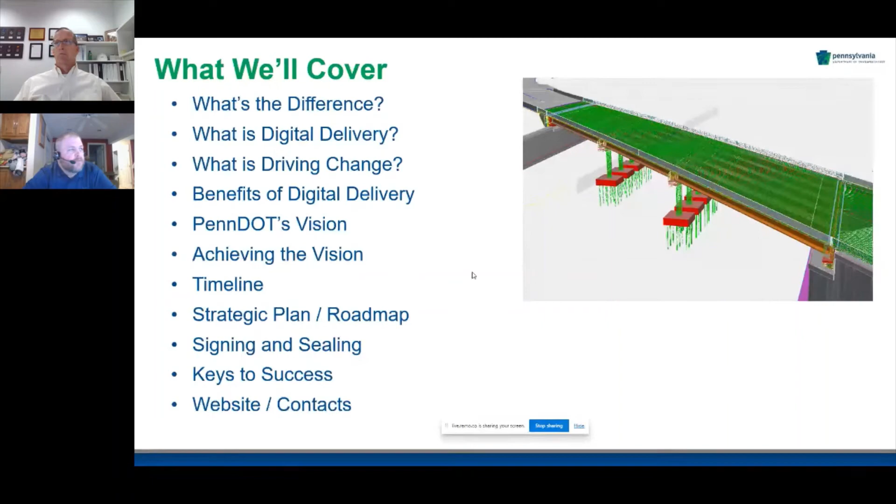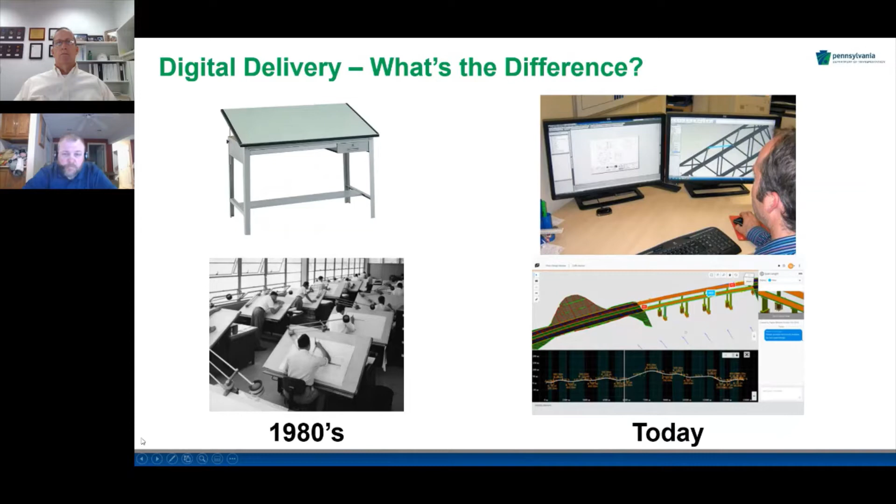So why would I take all of that capability available in that smart TV and put rabbit ears on it to get the most basic of signals we can have? That's what we're actually doing with our design processes. We take our designs, which some of us are already doing in a 3D environment, and basically dumb that down to 2D plans. Why? Because that's how we've always done it, that's the way we know how to do it. So in the analogy of the TV, it's that cathode ray picture on a high definition TV. Why? Because that's how we've always done it.

So it's really time to embrace a new way of doing things. Stop taking that smart data that we're developing in design and creating in construction and breaking it into less meaningful pieces. Really rethink how we approach the whole project delivery process, and the outcomes are limitless. We have so many possibilities, and we need to get away from that thinking of 'but that's how we've always done it.' We need to think outside of the box.

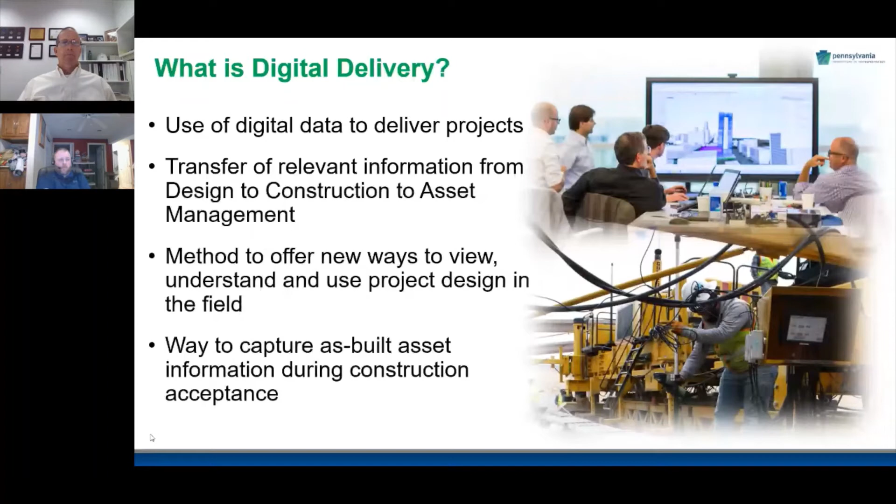So what's driving this change? The amount of data is becoming very hard to manage, and it's only going to exponentially grow over the next few years. So it's not just about managing or creating this data, it's how we're going to manage it. There's been a study done recently that showed employees spend an average of 1.8 hours a day searching for information. That's only going to exponentially grow if we don't manage our data correctly.

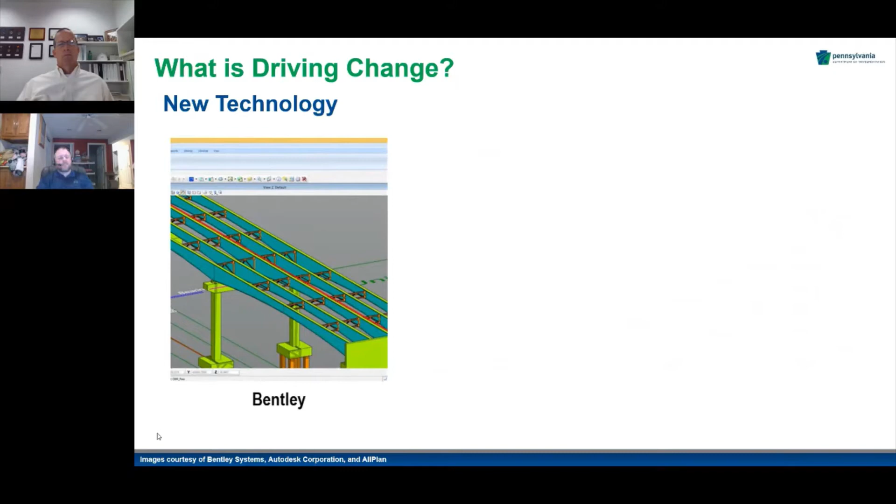So there's all kinds of new technology coming out that's going to enable us to do these models—the Bentley product, the Autodesk product, the Allplan software. Most highway agencies within the next year or so will be on the newest platform from one of these software providers. It offers us new functionality like dynamic change propagation and smart objects on these modern platforms, making it easier for us to develop these models and move forward.

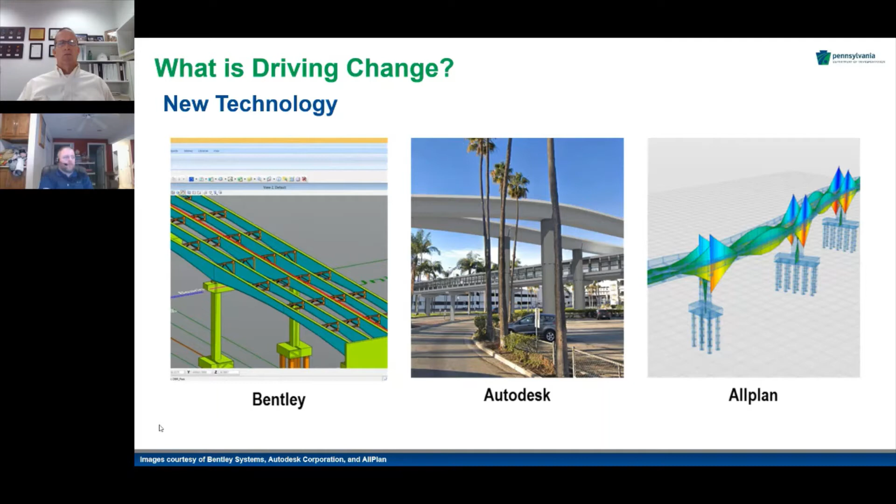So what does this really mean? We want to produce products and projects using this model-centric approach for design and construction. All the typical items we would see today on a normal traditional set of plans will still be included in that CAD model.

You'll see details—we'll be able to attach details as PDFs. You'll be able to attach calculations and spreadsheets directly into these models to convey that design intent to the contractor very easily. We'll be able to add photos, videos, Word documents, etc., again to give that design intent of exactly what was intended on these plans.

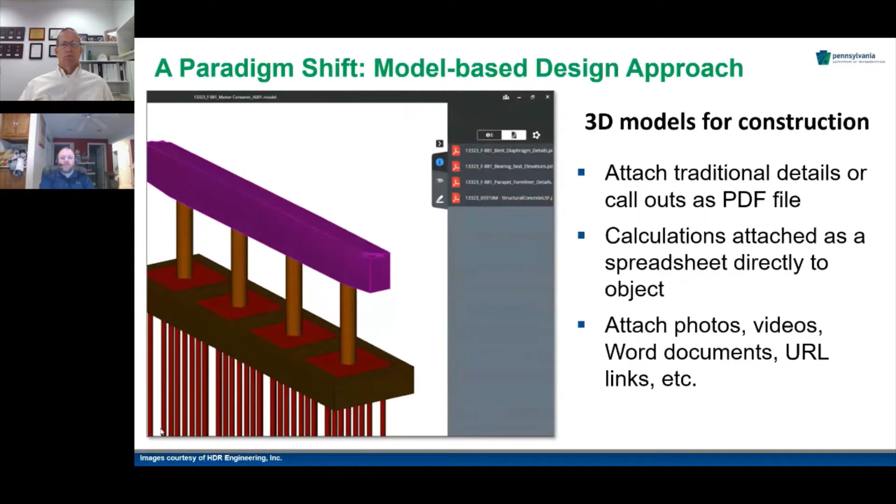So it is going to be a paradigm shift, and it's going to be a mixture of 2D and 3D objects. Some of the 2D objects may be right-of-way lines, paint lines, construction limits, but that 3D model will represent the overall design intent of our project.

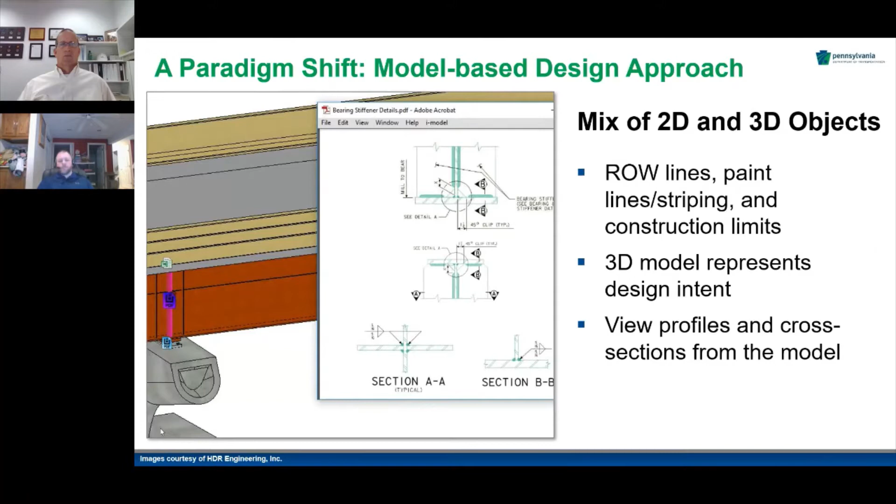We'll be able to view profiles and cross sections directly in the model, so we'll get away from cutting all of those sheets of cross sections—they'll all be in the model as we move forward. The model will be the document of truth, and it'll be contractually binding.

But we do realize there will be some plan sheets still necessary, like for right-of-way acquisition and recording. In Pennsylvania, we've just recently gotten our courthouses to accepting microfilm, so it will be some time before they actually accept models.

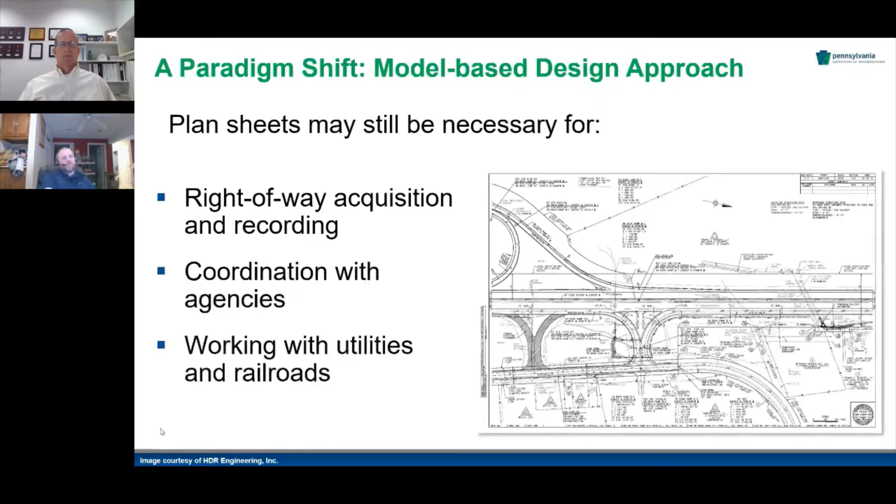So with that, we'll still have to provide plan sheets for coordination with outside agencies that may not be ready for models, working with utilities and railroads—some will be ready for it, some will not. So we may still have to produce plan sheets, but that model will still be the primary document of truth as we move forward.

So what are some of the benefits of moving towards digital delivery? You can see it in improved design quality, reduced risk and project costs, increased construction efficiency, and improved as-built records.

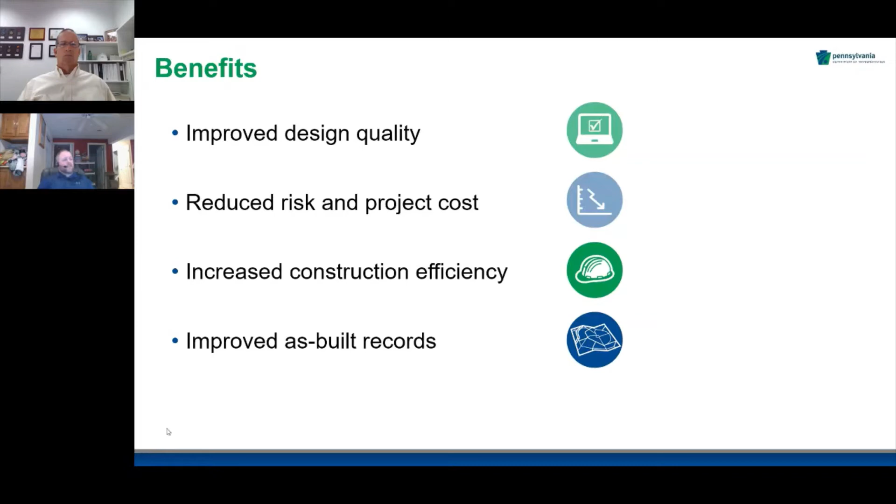So let's take a look at improved design quality. Once everybody starts designing using the model-based approach, it will be easier to review the quality of the design intent. A 3D environment will allow us to view the design in ways that were not possible with 2D plans. A model-based design approach will give us the opportunity to review our design intent before we bid the projects, and we'll be able to see the roadway and bridge details together and find issues earlier on.

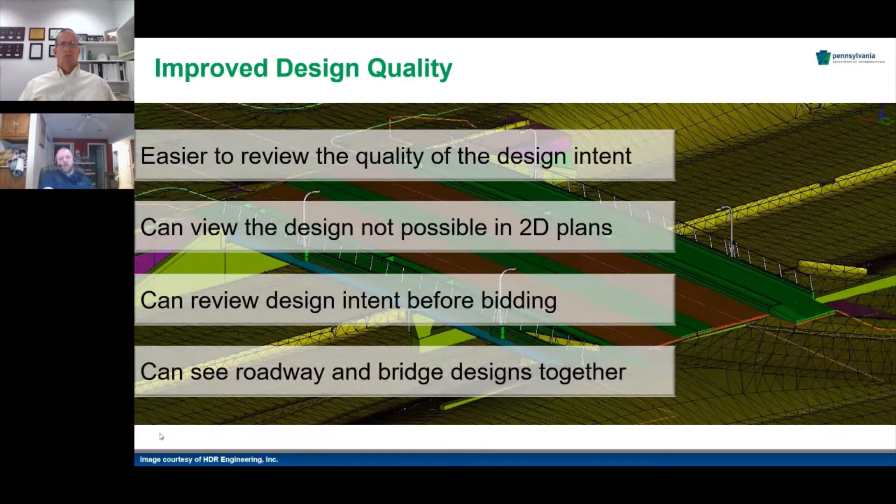Moving in this direction, this chart represents a plan-centric approach with the black line. This is where we put less time into detailed design and more into plan sheet development. That is our current process. It takes quite a while to develop those plan sheets and get them to meet whatever standards are required.

We want to move that line to the green line, line 4, a model-centric approach where we're able to add more detailed design and won't have to spend as much time on plan sheet development. Earlier in the project we have the ability to affect cost more easily, so it's a lot cheaper to make bigger changes than in a plan-centric approach where the cost of plan changes is much greater.

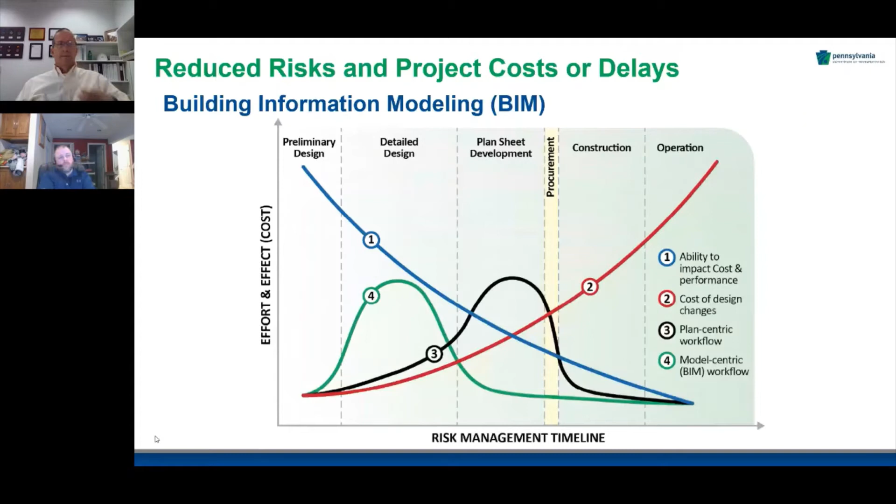As we look at the 3D models, they'll produce more accurate designs and allow us to enhance project coordination and quality reviews, especially for utility conflicts, but also design errors and omissions. The 3D design will let us identify constructability issues early on, which will translate into a reduction of change orders and unforeseen conditions, which account for a good bit of the cost of change orders.

These subsurface utilities were identified in the 3D model, done to a quality level I believe is D. They're shown as ribbons, representing the area where that utility could be. This lets us identify soft clashes and hard clashes as we move through design, helping minimize those change orders as we move to construction.

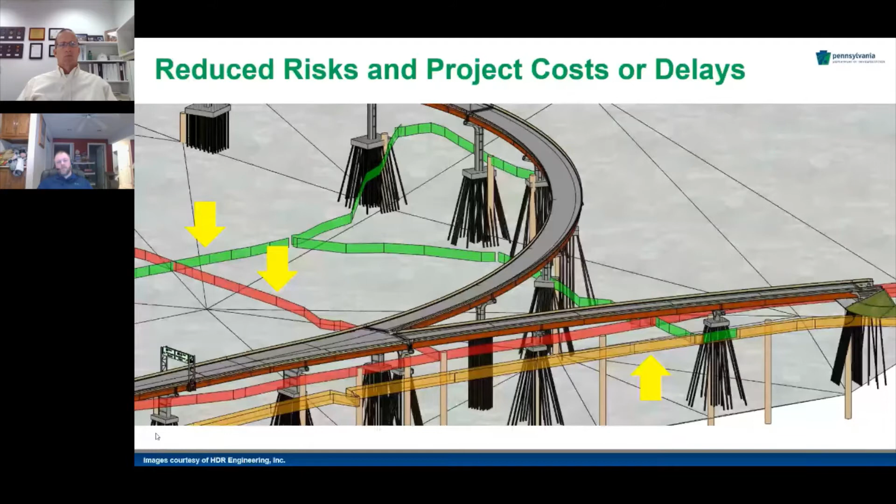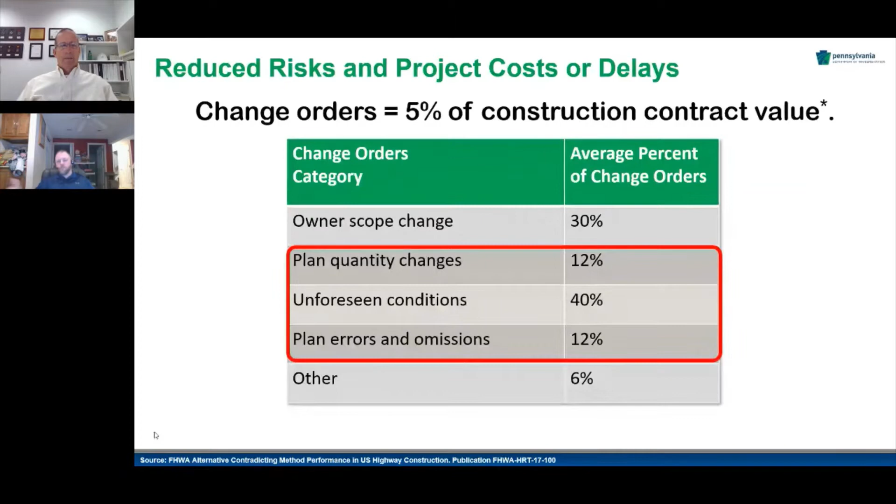As we were speaking, change orders account for nearly 5% of construction contract value. With digital delivery, we hope to reduce change orders in three areas: plan quantity changes, unforeseen conditions, and plan errors and omissions. With higher quality, more detailed design, we are hoping to realize these cost savings as we move forward.

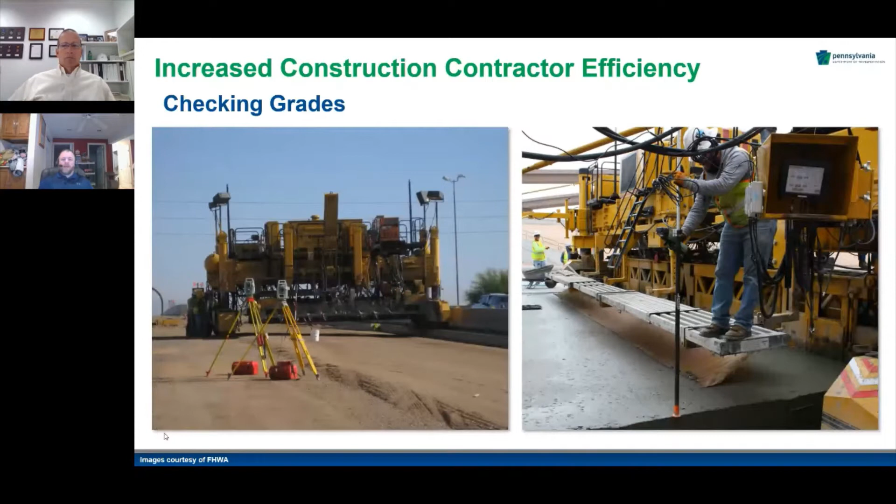In addition to the 3D deliverables, contractors will be able to leverage their automated machine guidance and survey instruments to check grades. Today, some contractors develop their own 3D models from the plans we provide them, which we hope to eliminate by having them trust the model we provide and put it right into their automated machine guidance.

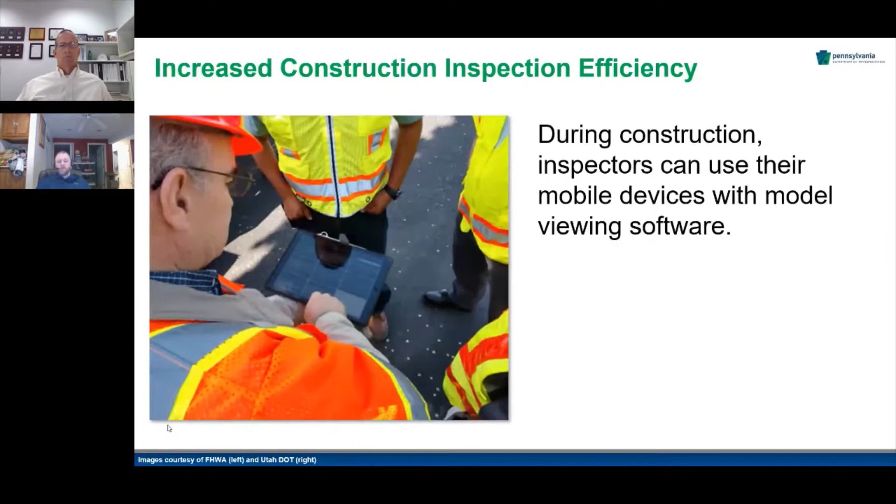During construction, inspectors can utilize mobile devices and model viewing software, which will provide both graphical representation and information on their platform.

The 3D models will be able to extract the attributes or properties from a lot of our e-construction applications. We are a big e-construction state in Pennsylvania, so we're always looking for all of these e-construction and mobile apps moving forward.

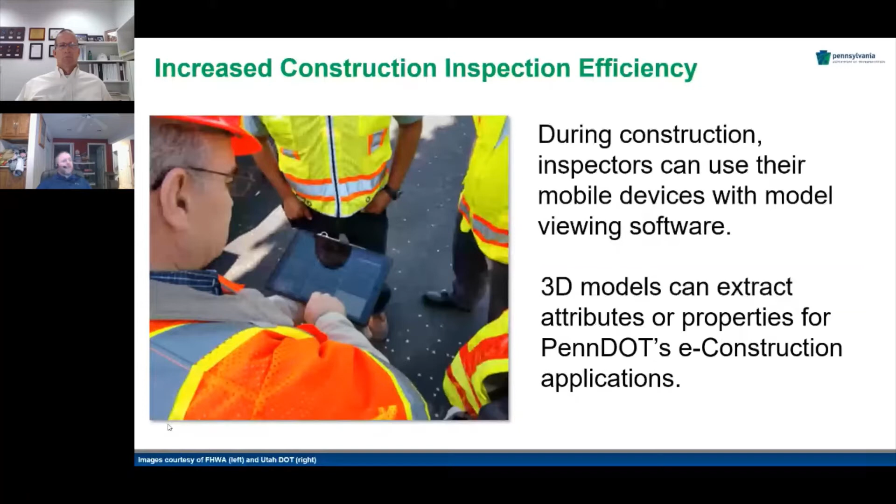As the model is created, we're going to be able to click on an item and view the pay item number, units, level, and all the relevant information we would need as we are designing and constructing this. That information would also be needed by design, construction, or asset management. All of it would be attached to the model to carry through the entire life cycle of the project as we move it forward.

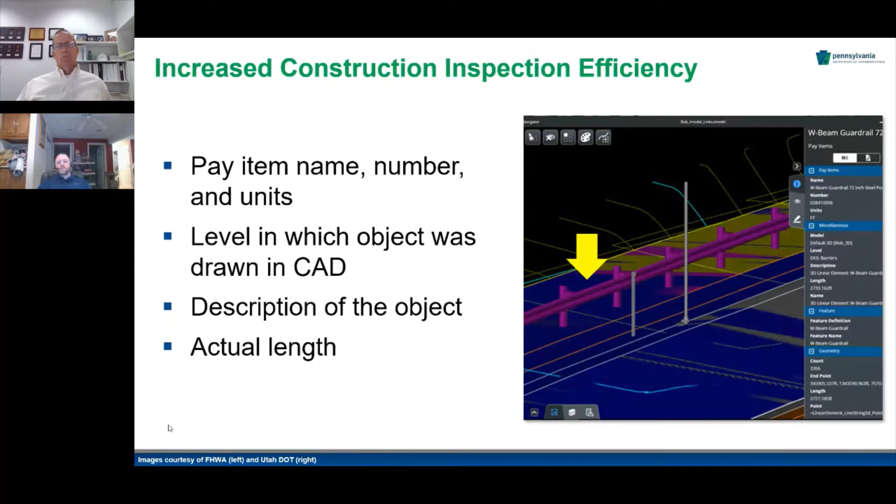Then we get to improved as-built records. Today we get a red line plan that bubbles around an item that changed. For example, with guide rail, we'll have our tab and summary sheets with a crossed out line showing exactly what quantity changed, but that's all we get back as far as what change was made.

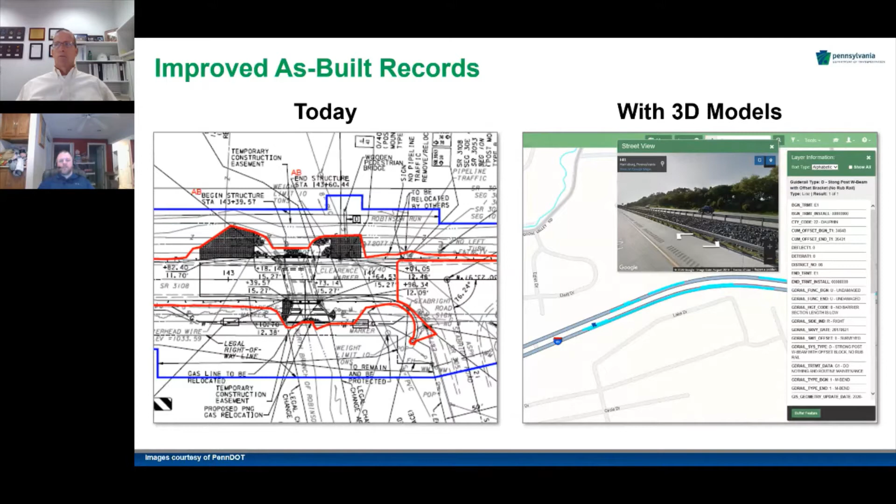With 3D models, we will get back the exact location and identification of where that asset was changed. We are going to require a 3D model to come back from the contractor as a digital as-built when we complete the project. That way we'll be able to bring all of that information into our asset management systems to track exactly where those assets were constructed as we move forward.

So with that, I will turn it over to Dan Giles to present on how we plan on achieving the vision of going digitally. Dan?

All right, thanks Alan. So like Alan said, let's talk about how we're going to achieve PennDOT's vision. PennDOT contracted our consultant team, led by HDR, to really develop and execute a 5-year strategic plan. We began that by engaging with a large number of internal and external stakeholders, really to seek input and document concerns people had, find out what the challenges were that need to be addressed, as well as really identify opportunities that we have that we can capitalize on.

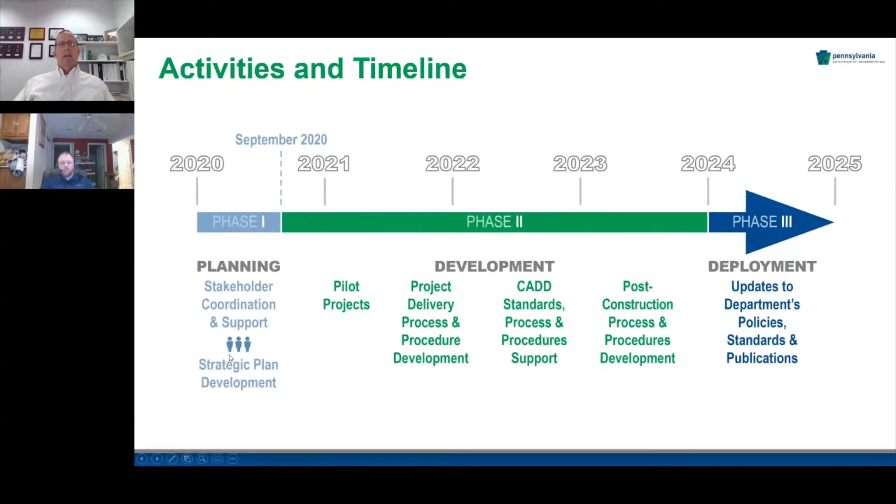So the digital delivery roadmap here illustrates that path forward for the directive. 2020, as I said, it was the development of that strategic plan. Here in this year, 2021, we're really focusing on some quick start tasks, things that are low barrier to entry type efforts. And then in the future, in 2022, we're going to begin to implement the modeling standards, really with a concentration on roadway design.

In 2023, we'll start to see introduction of bridge components into the directive. 2024, an introduction of drainage as well as advanced asset management requirements. And then in 2025, the department will have that ability to deliver digitally with that model as the legal document. In each year we'll pilot various aspects of the project delivery process and build on each case with increasing complexity year after year.

So here again, just to walk through the roadmap: 2020 or 2021 is those quick start tools, things like a model review checklist, spending some additional time looking at procurement language, how these changes impact both consultants and contractors, looking at developing a project execution plan template. There are also some initial pilots, things like looking at Concept Station, which is a visualization product through Bentley, as well as a guide rail as-built pilot project or a series of pilot projects.

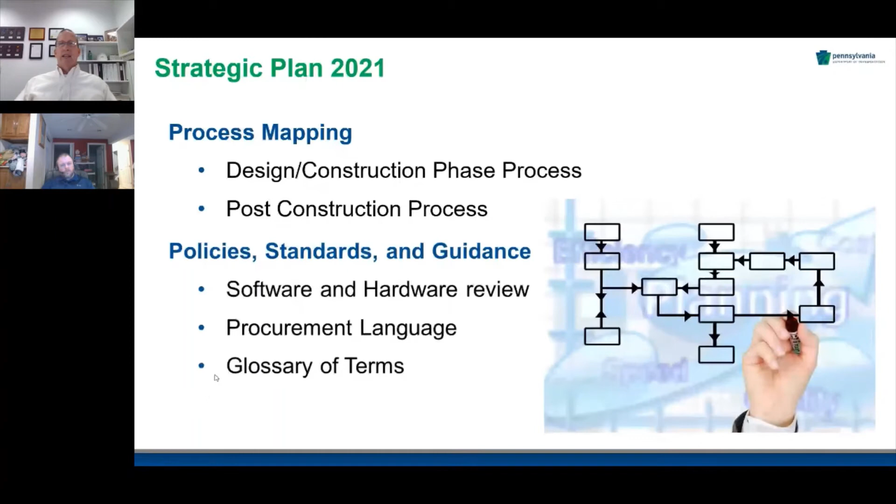As far as CADD standards and support, like I said, a lot of things related to setting modeling standards, development of a model element breakdown, which really is a very key feature moving forward with the modeling aspects, determining level of development specification.

As you step through the various phases of project delivery, how much detail has to be done for each one. We all have a good idea, if you've been in the industry for a while, like what's needed at line and grade and what's needed at design field view. We need to kind of lay that out as it relates to the models too, moving forward.

And then we've been providing support for ORD as far as really evaluating the department's maturity level with that, looking at their training documentation, how the data is organized, and helping to develop workflows with that as well.

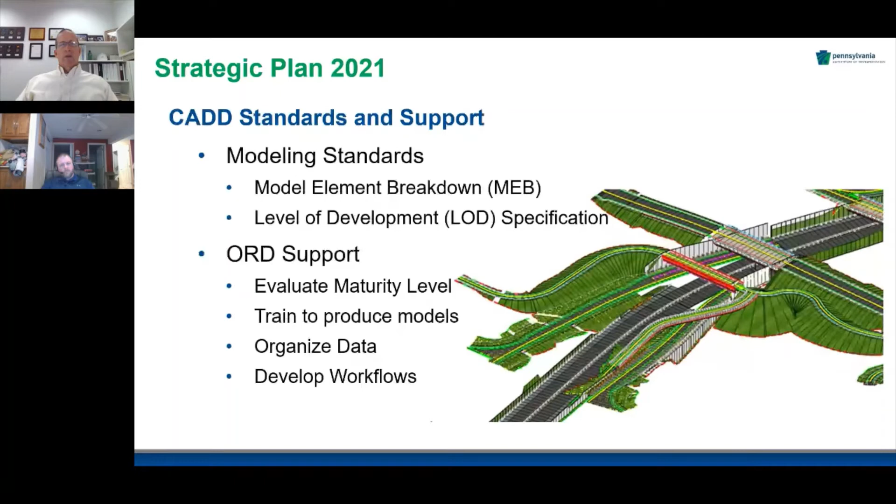So some of the pilot projects for this first year, as I had mentioned earlier, we've developed a BIM execution plan as to how things will process through. We've looked at requirements for getting those as-built records back.

One of our initial pilot projects is getting started on a very small scale, but getting guide rail information back from contractors and how that's going to interface on the back end from asset management.

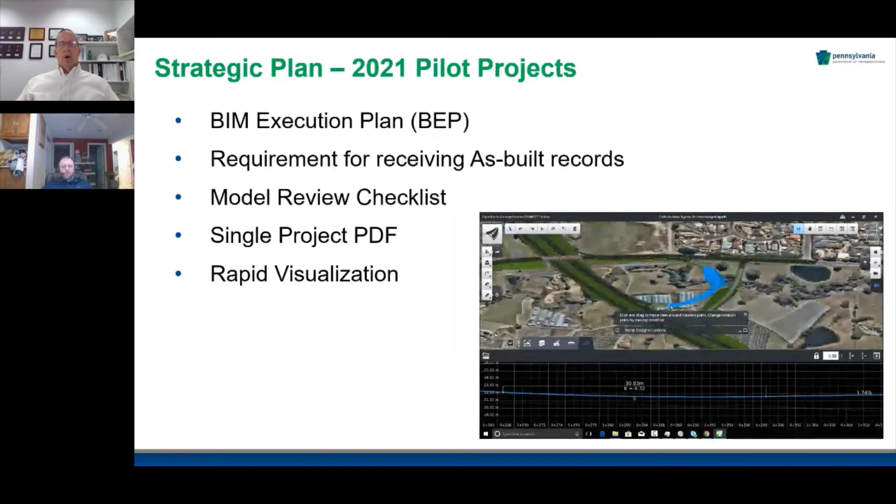We've developed a model review checklist. So as we're designing from a model centric viewpoint, how do we check those models? Right now we check plans, but we need the same kind of processes for checking our models in the future.

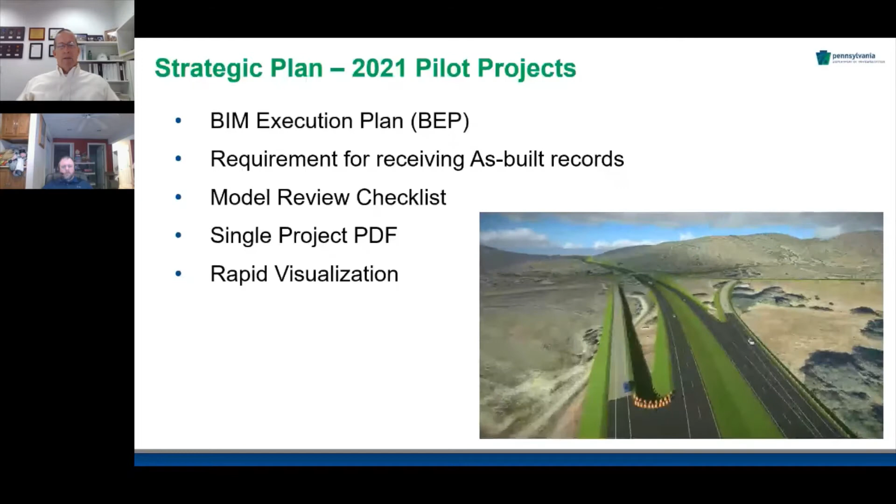We're working on a series of pilots for introducing single project PDF. And what that means is really, initially, we're going to try some pilots where we're replacing roadway construction plans and profiles with what is more like a roll plot PDF. And that's really to kind of get the construction community used to not receiving our deliverables in a sheeted plan form, because ultimately we're going to go to that deliverable being that model.

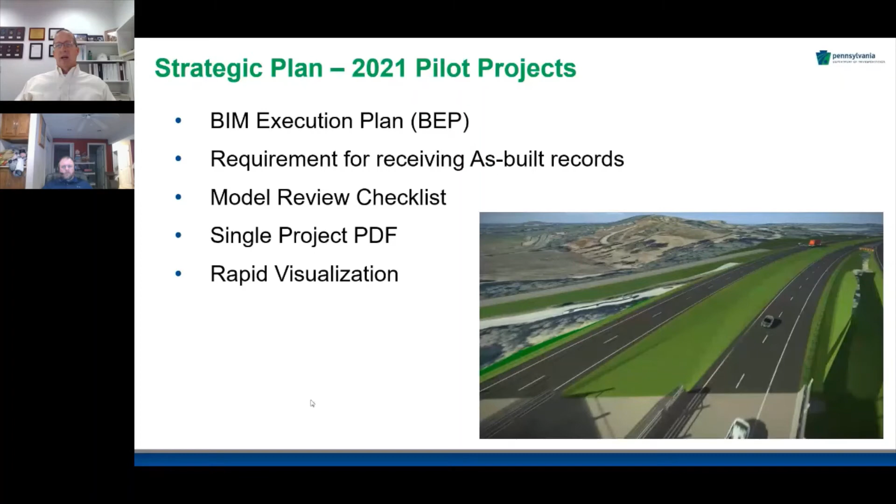As well as looking into options for rapid visualization. Some of the video that was on the screen was from Concept Station, and it gives real opportunity to do some really early design work and provide a quick visualization of that design.

So some of the focus of our pilot projects really is to roll out digital delivery workflows in a manner that allows the PennDOT districts to build the new technology progressively into their process over the life of the project. Our goal would be to have pilots across all of the districts every year that's incorporating the digital delivery workflows.

Then these pilot projects will likely include some kind of consultant design projects as well. We need to see both sides, that viewpoint from both sides, whether it's from the department side as well as the consultants. So with that in mind, PennDOT is utilizing the Bentley ORD software currently.

Even though PennDOT hasn't set a specific time frame for consultants to begin designing in ORD, it's really important, I think, to mention that consultants, particularly those wishing to be involved with some of these pilot projects, should begin to familiarize themselves with the software. So once we're completed with some of the pilots, the results will be evaluated by the Digital Delivery Directive 2025 Governance Committee.

And those results will be rolled out to all districts if they're found to be successful and useful. These pilots are going to be pieces of the process. As we find success, they're going to be implemented moving forward towards a full implementation by 2025.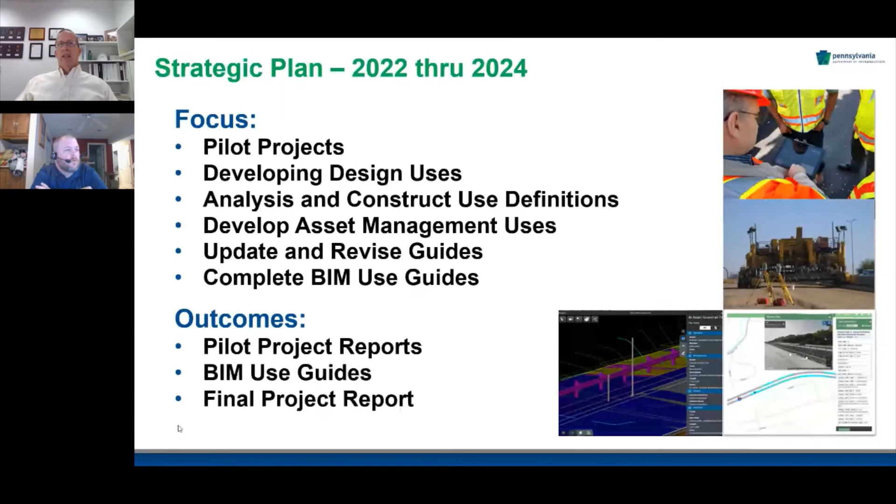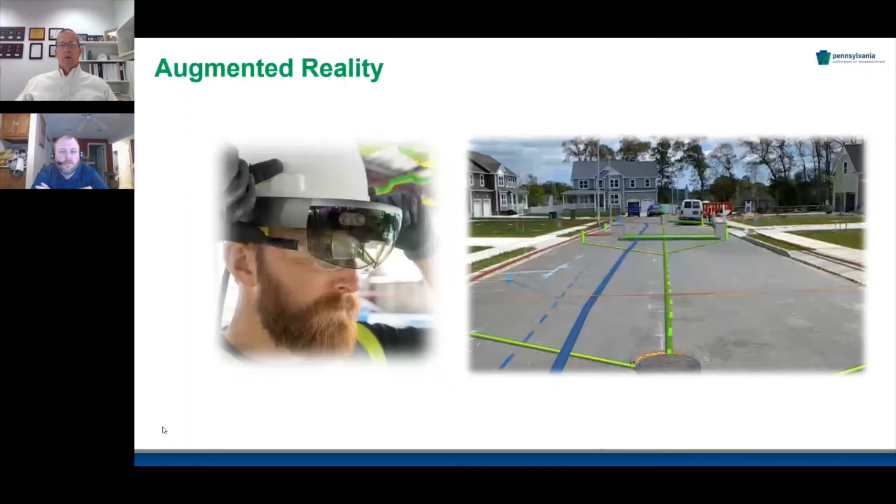Ultimately, for the future, with the advancement and development and use of models, we hope to expand the use of augmented reality for design and construction. So just a couple quick pictures of what could be coming in the future as well.

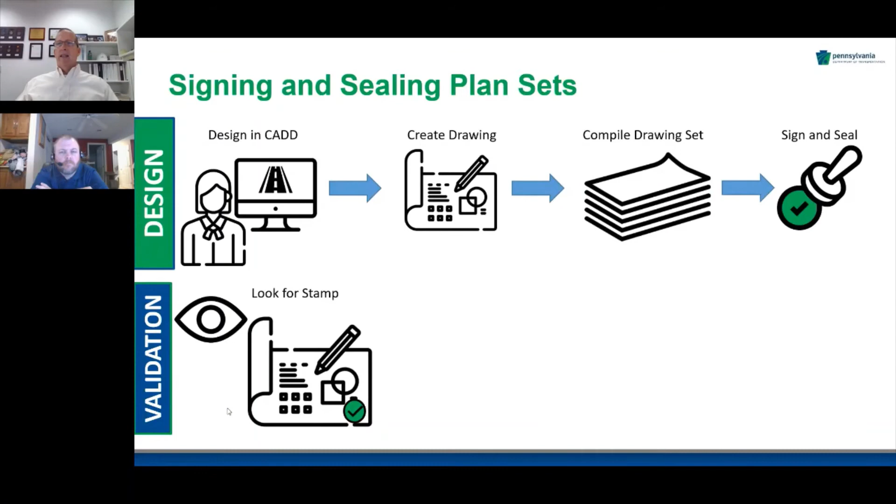In the future, without having the plans as the deliverables, our initial thoughts are to have that engineer of record sign and seal a document which lists all of the digital files that comprise that model. Those files will be time-stamped and will be that official version of the model.

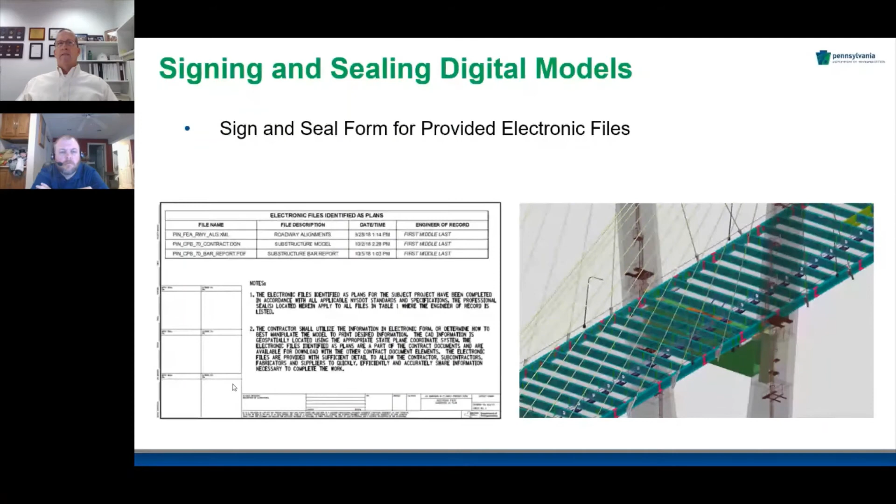So really, what are our keys to success? We've identified some things to ensure that the digital delivery directive is successful, and it really comes down to managing expectations and making people feel empowered and in control. First of all, we need to make sure that the pace of change is appropriate, not overwhelming, but also so that people can see things are happening in every discipline and every district.

Even if every district is involved in a pilot, most staff won't be directly affected in the early years. We need to put information about our progress in a place that people can access it. As I indicated, we are working on a website so that we can disseminate information about our progress, and so the industry as a whole can get a sense of when and how they're going to be affected.

We also need to really create a culture where people can speak up when things don't work, and ask for and receive support when it's needed. We're going to have successes and failures, and it's really going to be important that we utilize that feedback from each of the efforts, whether good or bad, to continue that journey forward. We need open and honest feedback to improve and refine the workflows and tools that are put in place, and we want people to feel empowered, not worried.